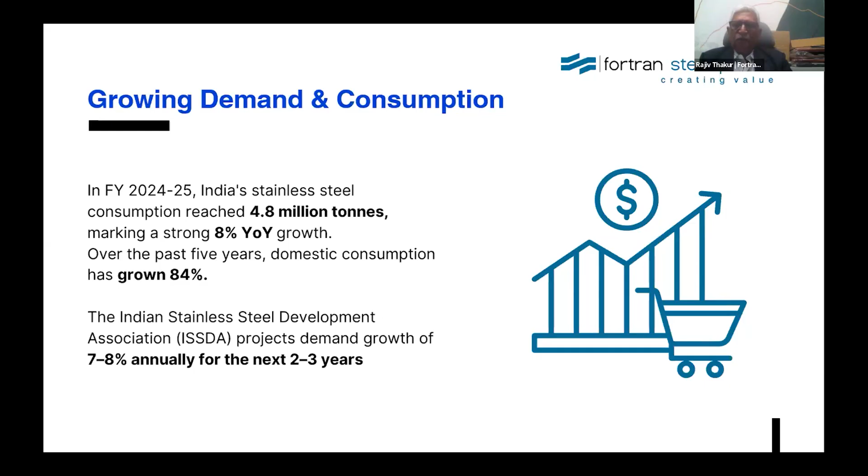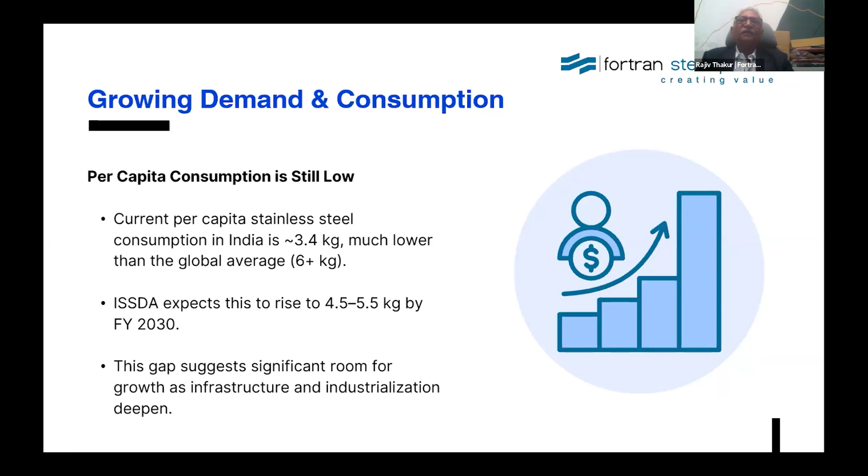In my subsequent slide, you'll be able to appreciate how the growth will take place in case of stainless steel. Growth, demand, and consumption areas: infrastructure and construction, as you know, railways, metros, airports, highways, tunnels are the key stainless steel users. Green energy, new areas like green hydrogen.

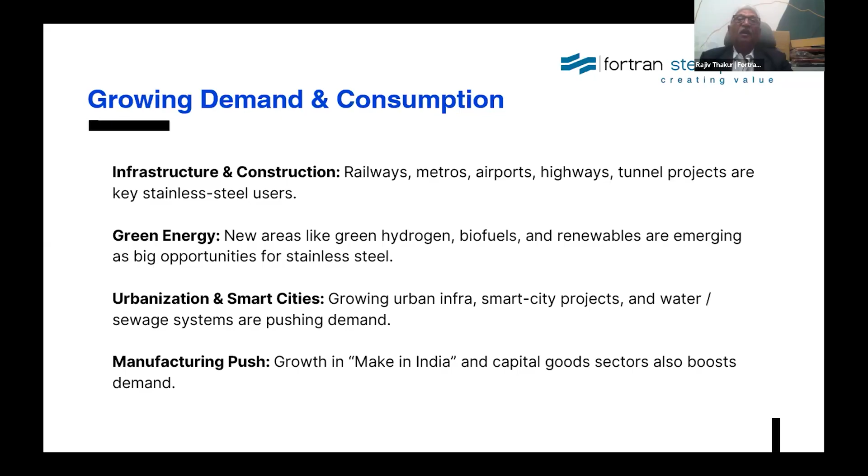Everybody knows about green hydrogen, and it is the talk of the day also. Biofuels, and in renewable areas also big opportunity for stainless steel. Urbanization and smart cities, growing urban infra, smart city projects, water sewage systems, are having very, very pushy demand. Then manufacturing push, growth in Make in India and capital goods across our country as well as internationally.

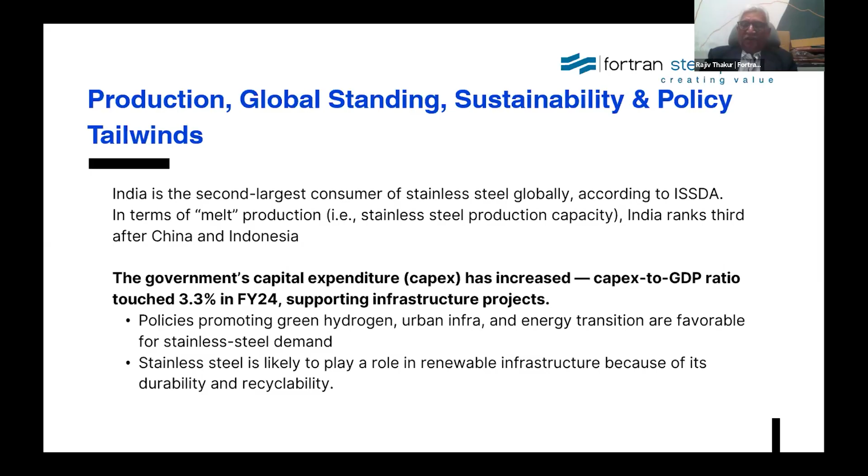This production, global standing, sustainability and policy tailwinds. India is the second largest consumer of stainless steel globally. In terms of melt production, stainless steel production capacity, India ranks third after China and Indonesia. The government's capital expenditure has increased, touching 3.3% in financial year 24, supporting infrastructure projects, policies promoting green hydrogen.

What are the industry challenges for stainless steel? Raw material and cost pressure. Demand is strong, but securing raw materials and managing production costs could be a bottleneck. Competition and imports, as all of you know, we are getting a lot of imports from free trade agreed countries, especially from Indonesia, Vietnam, and Japan. So it is really affecting our domestic production.

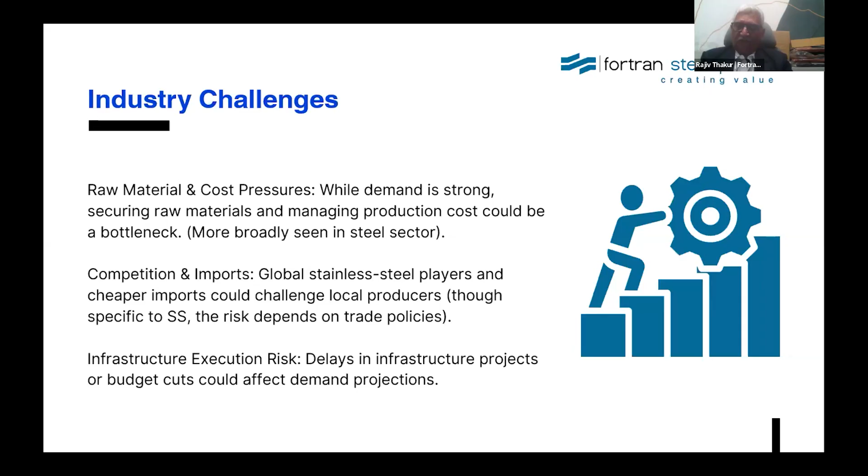Then infrastructure execution risk: delays in infrastructure projects or budget cuts could affect the demand projection. What is the future outlook? As per ISSDA, it projects stainless steel demand to reach around 6.8 million tons by financial year 2030. India will be pushed further into green hydrogen, renewables, and smart infrastructure. Stainless steel demand for specialized applications like hydrogen pipelines and storage will likely expand and increase.

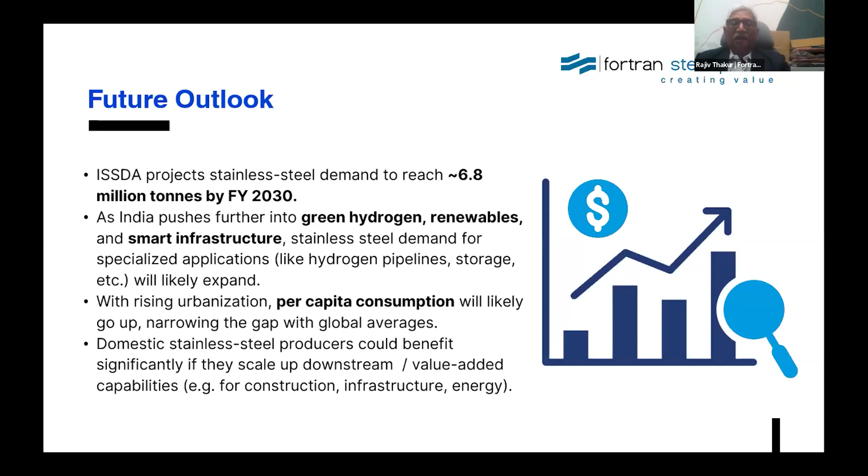With rising urbanization, per capita consumption is going to further increase, narrowing the gap with the global average. Domestic stainless steel producers could benefit significantly because of the demand push by the areas I have mentioned, if they scale up their downstream value-added capability, for example for construction, infrastructure, and energy.

What are the implications for stakeholders? Policymakers supporting stainless steel through incentives for green hydrogen, accelerating sustainable infrastructure, manufacturers investing in technology as well as upstream, downstream integration, capturing growth in domestic opportunity. Investors who give money for these stainless steel projects in India have a favorable demand outlook. So it's good for infrastructure as well as green energy strongly.

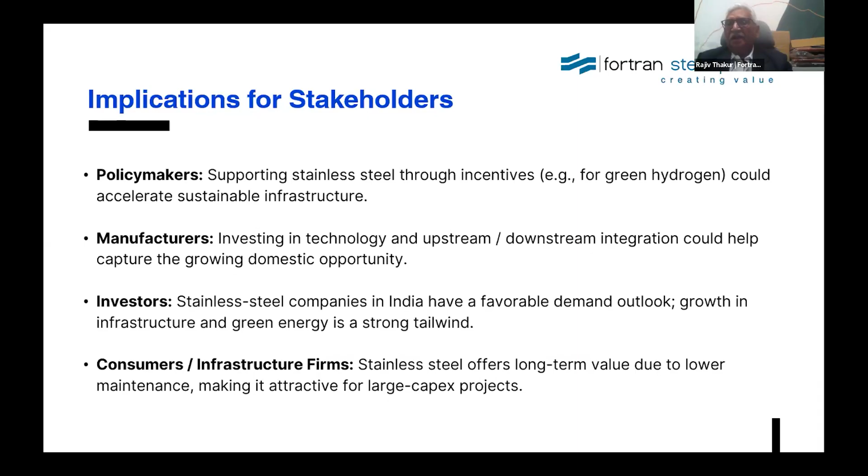Consumers, infrastructure firms - stainless steel offers long-term value with less maintenance, making it very, very attractive compared to mild steel. Now I'm coming to part two of the topic.

The areas where stainless steel is being used, or is perceived to be used in the near future. I will be touching upon three segments, three sectors. The first one is infrastructure, the second one is construction, and the third one is automotive. It is in these three sectors driving a durable future with stainless steel. Stronger cities, smarter mobility, sustainable steel.

Shaping infrastructure, engineering tomorrow. Mr. Bhansali has also told you about the usage of stainless steel and how it will be used for the future also - stainless steel built to last, designed to inspire, innovating mobility and infrastructure with stainless steel strength.

Where can we use stainless steel in infrastructure? It is being adopted in modern infrastructure because it combines strength, corrosion resistance, aesthetic appeal, safety, and long-term sustainability, which is not the case with mild steel. Although price-wise it is on the higher side than carbon steel, if you do the cost-benefit analysis, you'll come to know that it's going to be very, very economical if you see the life cycle cost of the product.

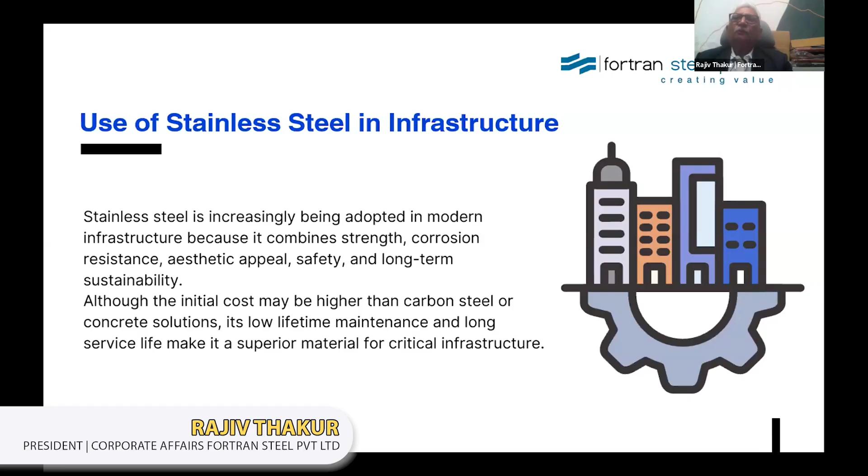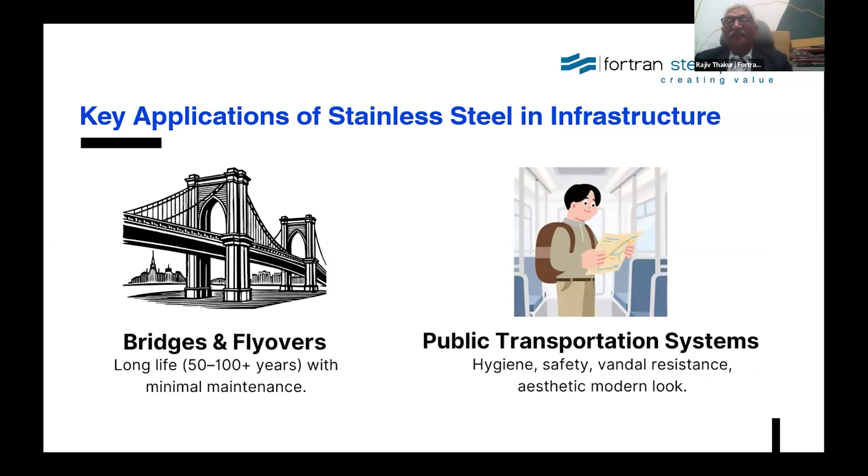Key applications of stainless steel in infrastructure: bridges and flyovers with long life, 50 to 100 years, with minimal maintenance. Then public transport systems - hygiene, safety, vandalism resistance, aesthetic modern look.

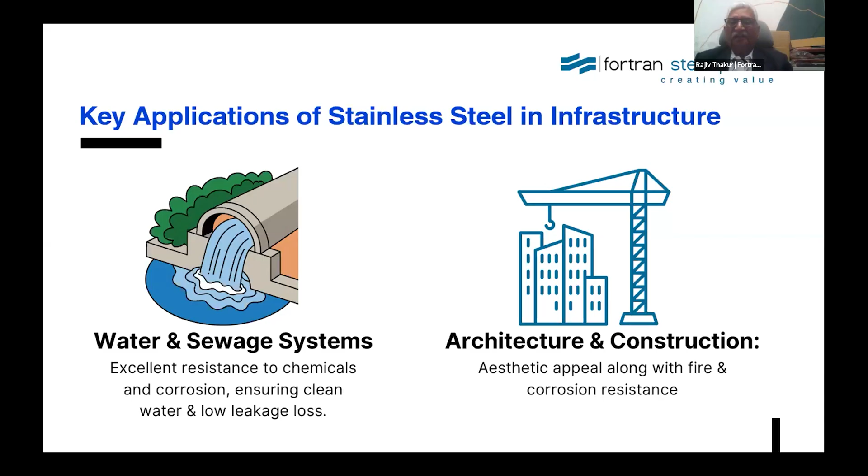Water and sewage systems benefit from excellent resistance to chemicals and corrosion, ensuring clean water and low leakage loss. In architecture and construction, there's aesthetic appeal along with corrosion resistance. Urban infrastructure and civic amenities gain high durability and low maintenance in outdoor environments.

Public transport systems, metro and railway stations use it for roofing, cladding, benches, railings, train coaches, doors, ticket counters, escalators, bus stop terminals, and airport infrastructure. The benefits are hygiene, safety, vandal resistance, aesthetic appeal, and a modern look.

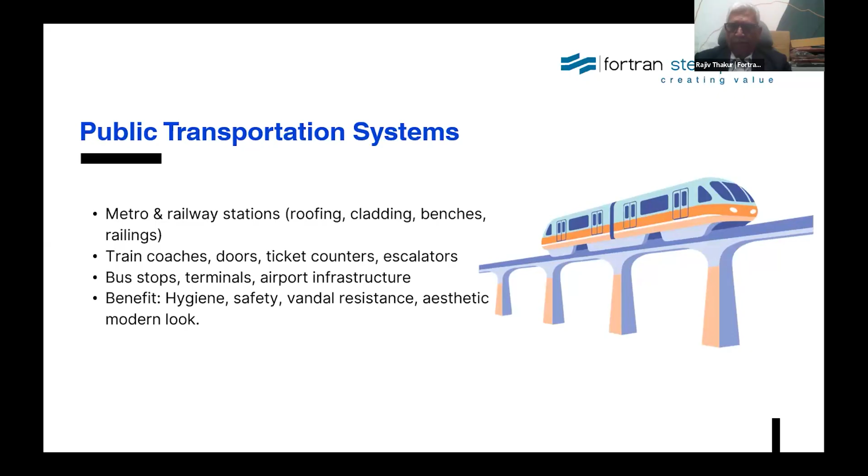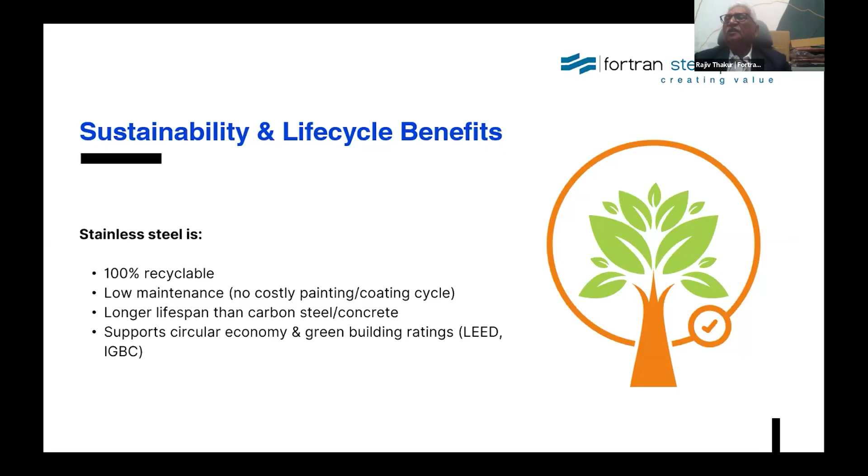Then comes sustainability and life cycle benefits: 100% recyclability, low maintenance cost, absolutely no cost for painting, varnishing, or coating, longer lifespan than carbon steel or concrete, and support for circular economy and green building ratings.

What are the economic advantages? Everybody knows stainless steel has a higher initial cost than normal mild steel. However, it has a lower life cycle cost, reduced downtime, fewer repairs, especially in coastal, industrial, and polluted environments. Total cost of ownership is significantly lower compared to conventional steel if you see it in totality.

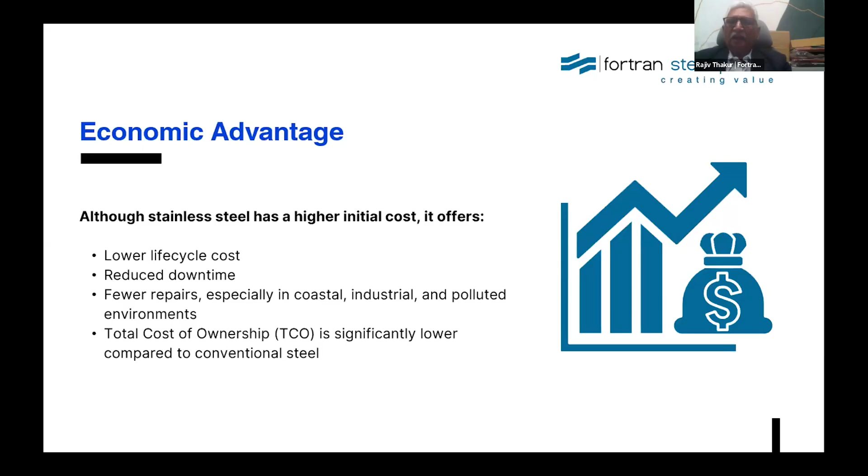Emerging trends: high strength duplex stainless steel in mega infrastructures, stainless steel reinforcement bars replacing carbon steel bars in coastal areas. The Government of Maharashtra has made it mandatory to use stainless steel rebars only in coastal areas. Smart cities are demanding durable, vandal-resistant materials.

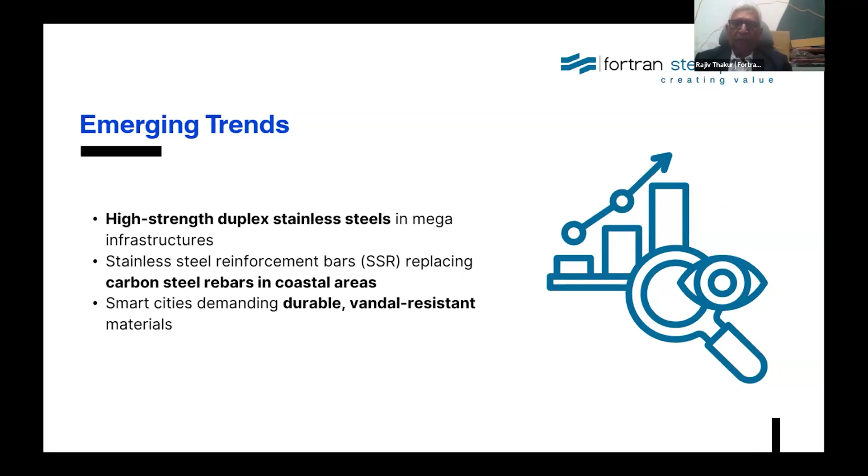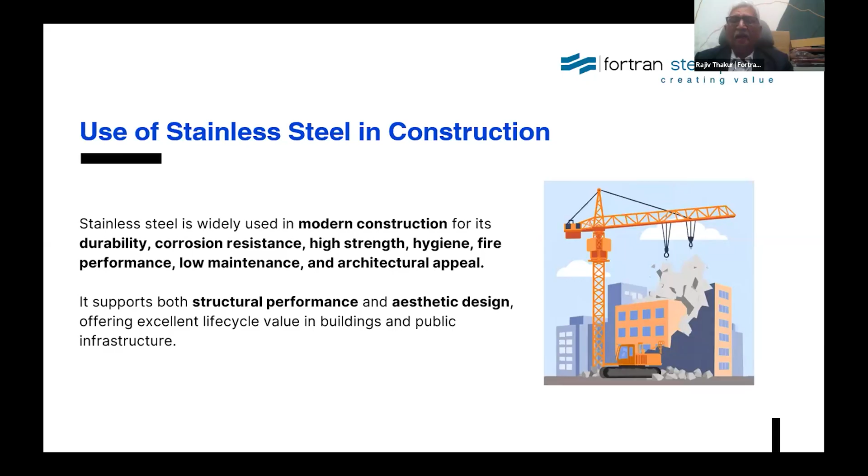Now comes the use of stainless steel in construction. It is widely used in modern construction for its durability, corrosion resistance, high strength, hygiene, fire performance, low maintenance, and architectural appeal. It supports both structural performance and aesthetic design, offering excellent life cycle value in building and public infrastructure.

Applications in construction include structural components, load bearing beams and columns, reinforcement bars (TMT bars) especially in coastal, chemical, or adverse environments, expansion joints, connectors, fasteners, and anchor bolts, offering high tensile strength, resistance to fatigue and cracking, and zero corrosion, critical where safety is paramount.

The recommended grades are the normal grades SS304, 316, and duplex for aggressive environments. We are capable of manufacturing these grades, and rather we are regularly manufacturing these grades.

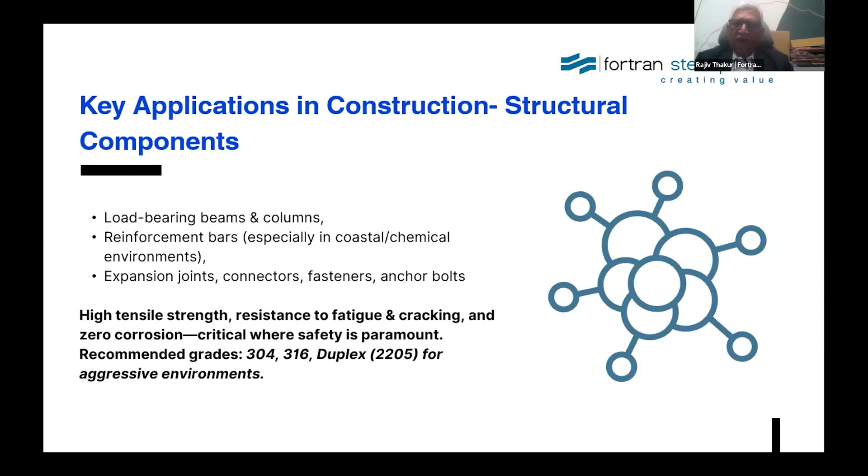Building facades and cladding applications include exterior wall cladding, roofing, curtain walls, canopies, fascia panels, and decorative exteriors. Interior architectural elements include staircases, handrails, balustrades, elevator interiors, door frames, cabinet hardware, and kitchen and hygienic areas.

Why stainless steel? Everybody must be wondering. Because it's hygienic, easy to clean, durable against wear, visually premium, weather resistant, has a modern aesthetic look, reflects heat, has minimum cleaning cost, and offers 40 to 100 years of life.

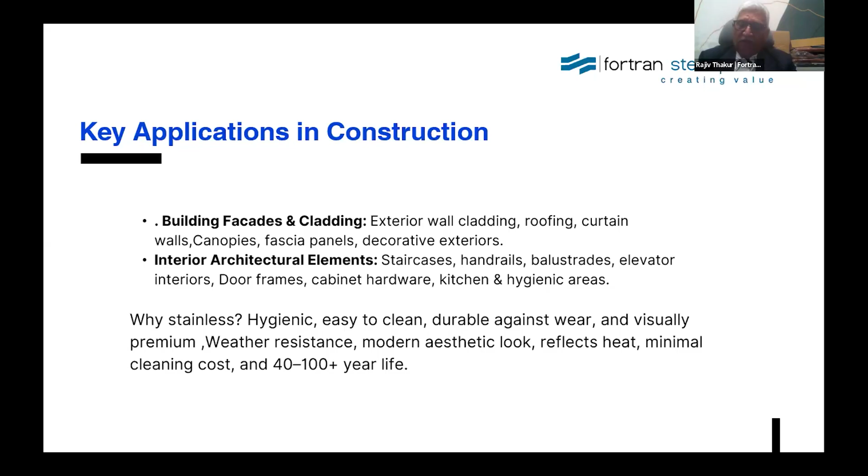Applications in construction also include fire and safety applications, water and plumbing systems, water pipes, tanks, valve fittings, drainage systems, solar water heating, building HVAC piping, and urban and outdoor spaces.

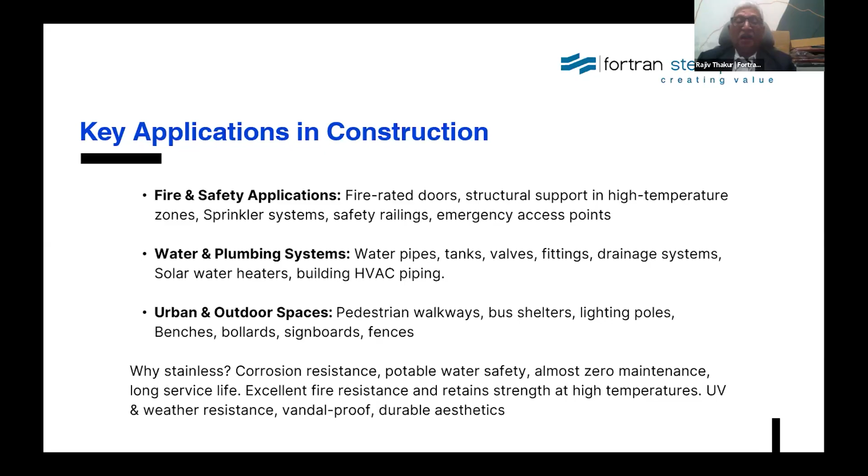Again, why stainless steel? Because of corrosion resistance, potable water safety, almost zero maintenance, long service life, excellent fire resistance, retained strength at high temperature, UV and weather resistance, vandal proof, and durable aesthetics.

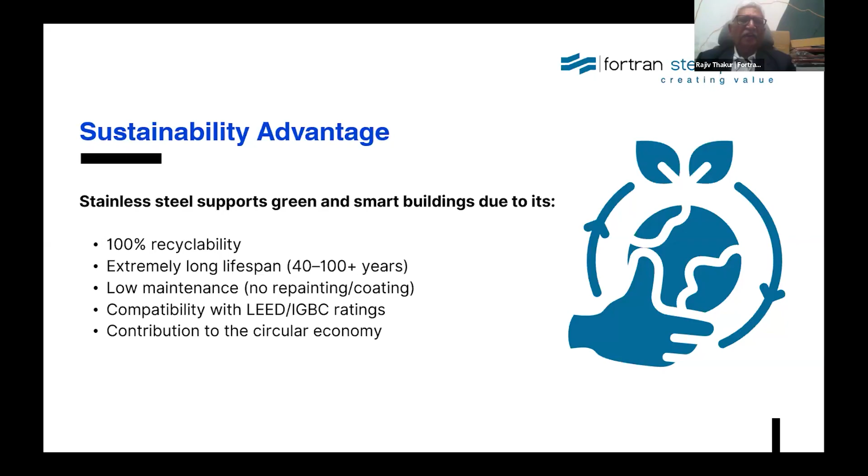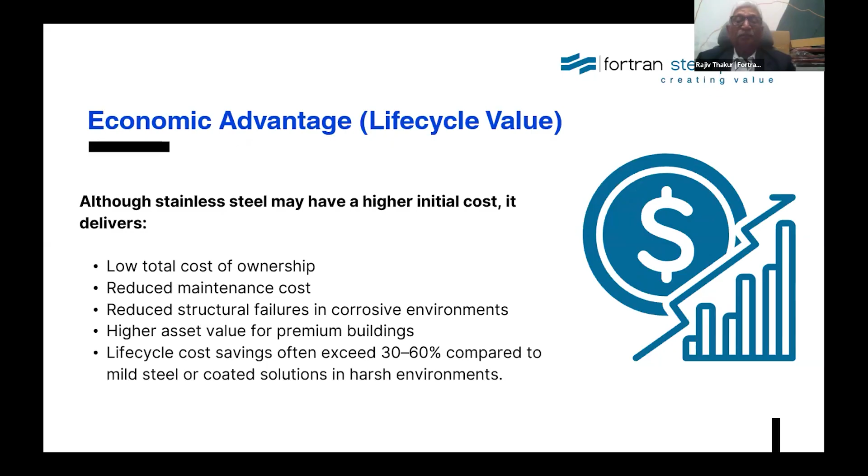Sustainability advantage: it's 100% recyclable, with extremely long lifespan of 40 to 100 years, low maintenance, no repainting or coating cost, compatibility with LEED and IGBC rating, and contribution to the circular economy. Economic advantage: life cycle value, low total cost, reduced maintenance cost, reduced structural failures in corrosive environments, higher asset value for premium buildings, with life cycle cost savings exceeding 30 to 60% compared to mild steel or coated solutions in harsh environments.

What are the emerging trends in construction? Smart and green buildings use stainless steel for energy efficiency as a recyclable material. Coastal and industrial construction uses corrosion-proof reinforcement bars. Smart and green buildings benefit from easy-to-fabricate, high-strength components. Prefabricated buildings use textured, patterned, colored stainless surfaces for long-life structures and amenities.

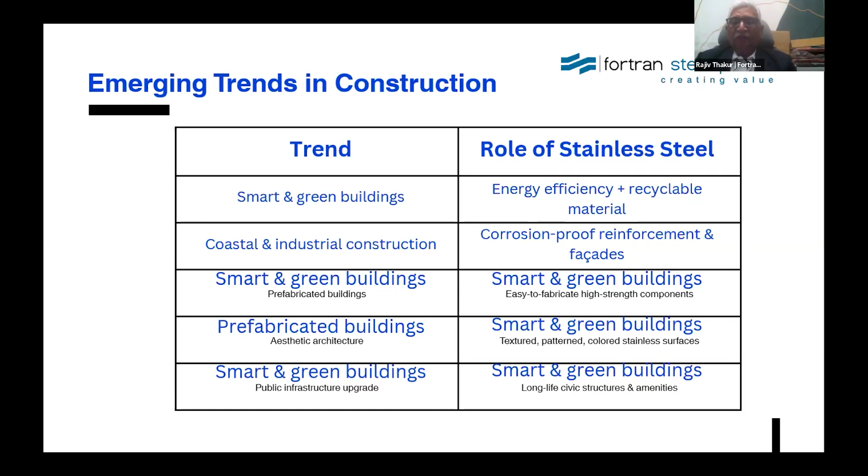In the automotive sector, stainless steel has become very sought after. It is a modern automotive engineering material thanks to its strength, corrosion resistance, crash worthiness, recyclability, and heat tolerance. It contributes to vehicle safety, durability, fuel efficiency, and sustainability.

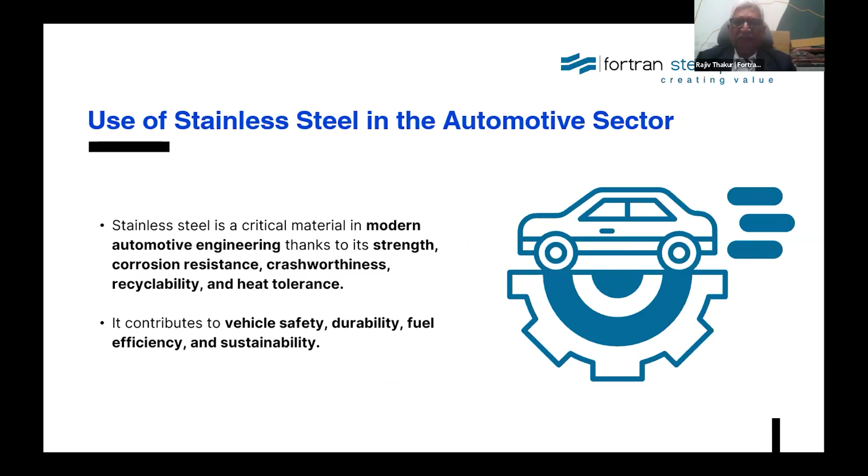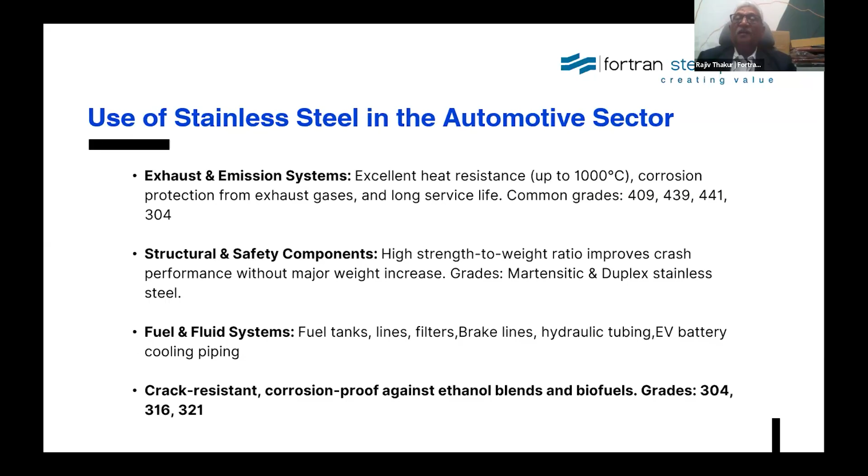Use of stainless steel in automotive sectors includes exhaust and emission systems, where temperature resistance is up to 1000 degrees centigrade, structural and safety components with high strength-to-weight ratio, and fuel and fluid systems including fuel tanks, lines, and filter brake lines, which are crack resistant and corrosion proof against ethanol blends and biofuels. Common grades are SS304, 316, and 321.

Electric vehicle applications include battery enclosures, cooling plates, tubing, bus bars, connectors, and hydrogen fuel cell plates for heat management and hydrogen resistance. Interior and exterior components include decorative trims, grills, logos, wiper arms, window trims, seat frames, and hinges, offering aesthetic finish, corrosion resistance, and recyclability in heavy commercial vehicles and two-wheelers.

Sorry to interrupt you, sir, but we are already running out of time. Can you conclude in one minute?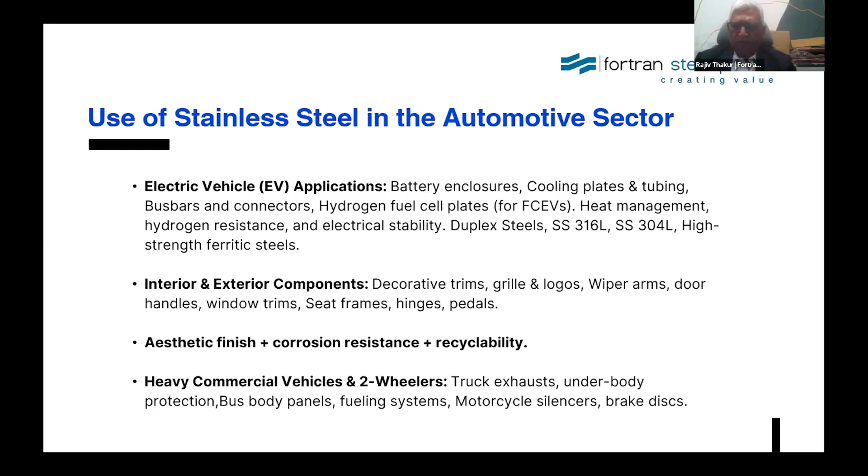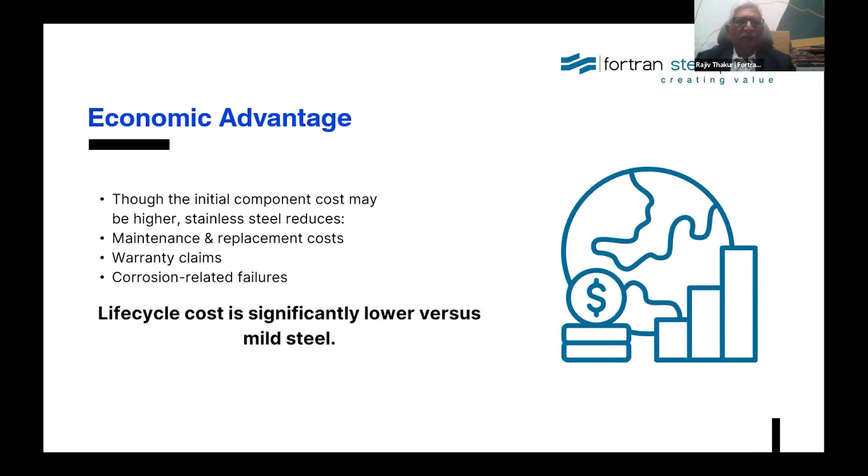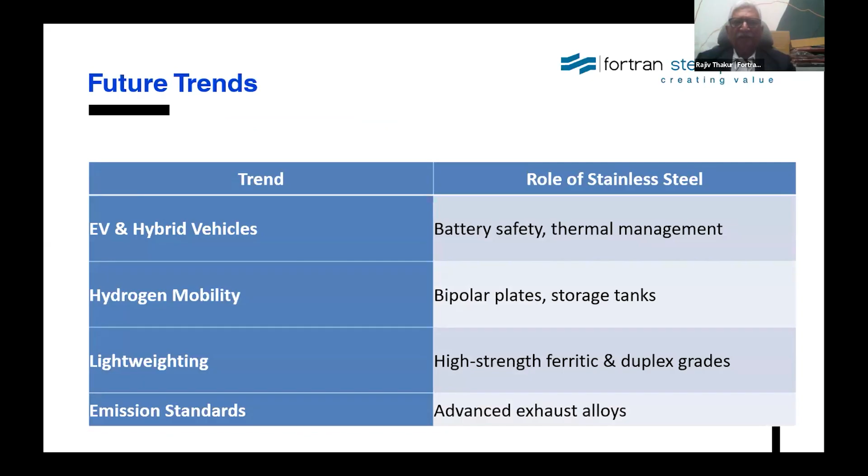Sustainability: 100% recyclable with zero degradation. Stainless steel supports net zero mobility. Economic advantage: life cycle cost is significantly lower versus mild steel. The trend is EV and hybrid vehicles, where stainless plays a role in battery safety, thermal management, hydrogen mobility, bipolar plates, lightweight design, and meeting emission standards and exhaust alloys.

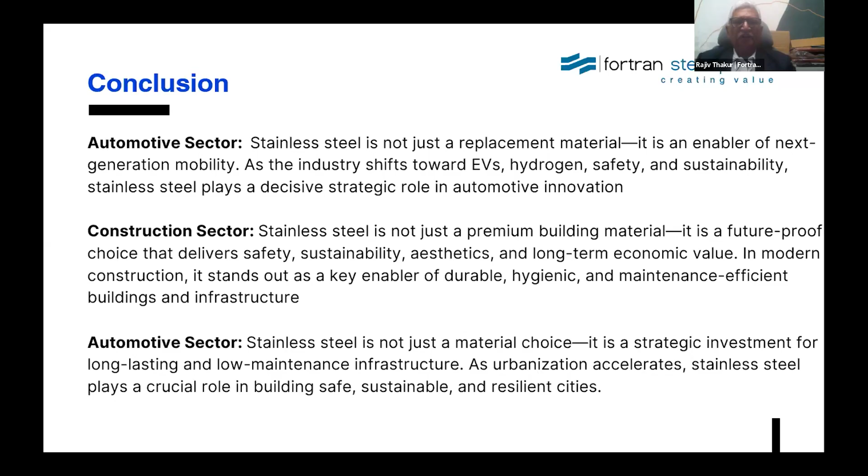So in the automotive sector, as I have explained, it is not just a replacement material but a generational shift in mobility. In the construction sector, it is not just premium building material but delivers safety, sustainability, aesthetics, and long-term economy. The automotive segment is for long-lasting and low-maintenance infrastructure. Thank you very much.